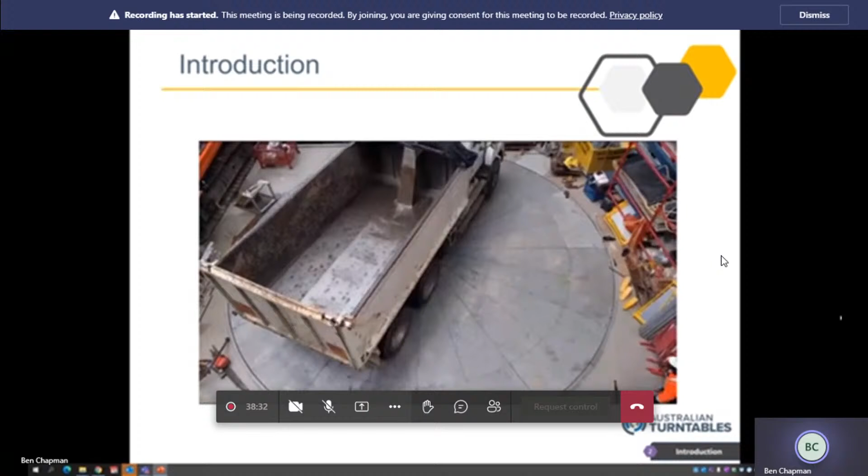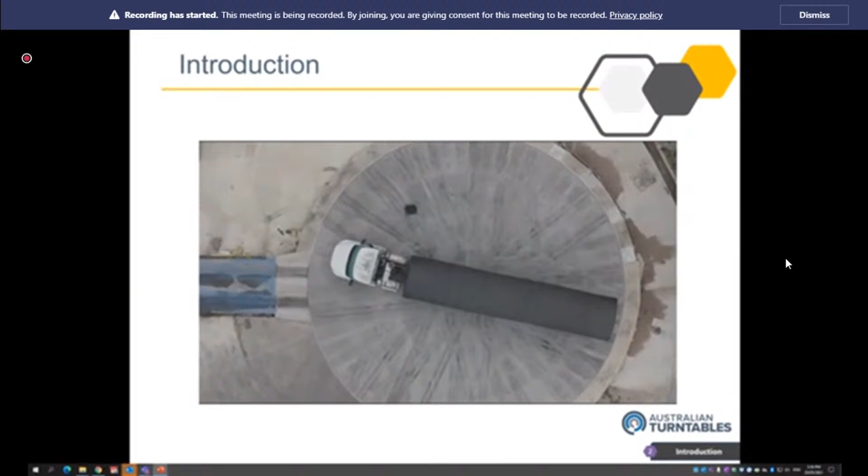I'll just start off with the first slide, which is a bit of an overview showcasing some of our heavy industry projects. You'll see here a number of different industries and applications, but all very much centered around the same simple process of positioning trucks a lot more simply on a construction site.

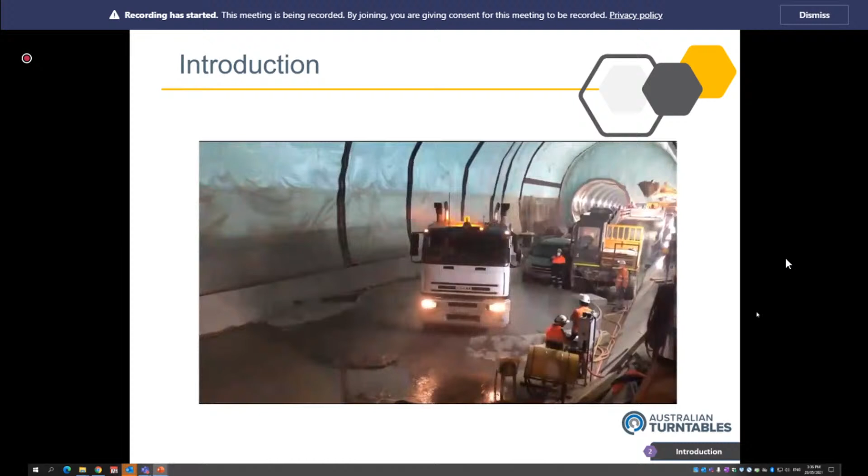Again, I want to say thank you for this opportunity. We have developed a new way for the tunnelling and construction industry to improve safety and efficiency on job sites. We're here to discuss the benefits and the details. We've been considering the tunnelling industry for quite some time, delivering solutions for projects mostly in Australia for the past 6 or 7 years. I'll show you another quick video, a case study of a recent project we performed for the Sydney Metro site just last year.

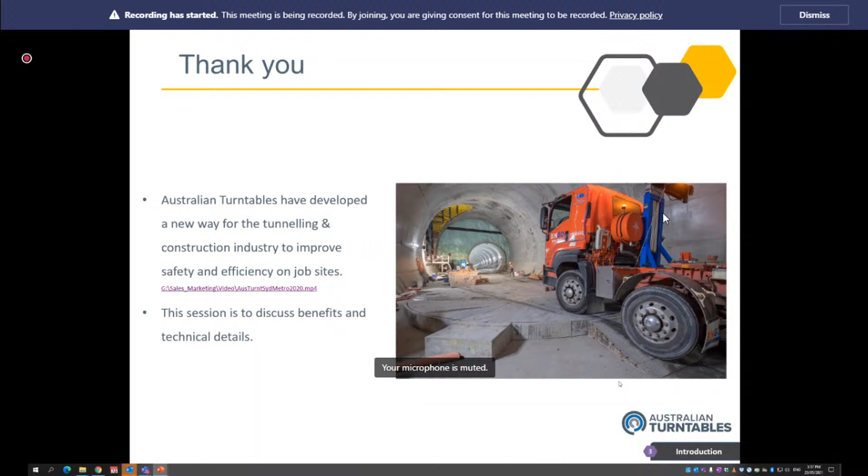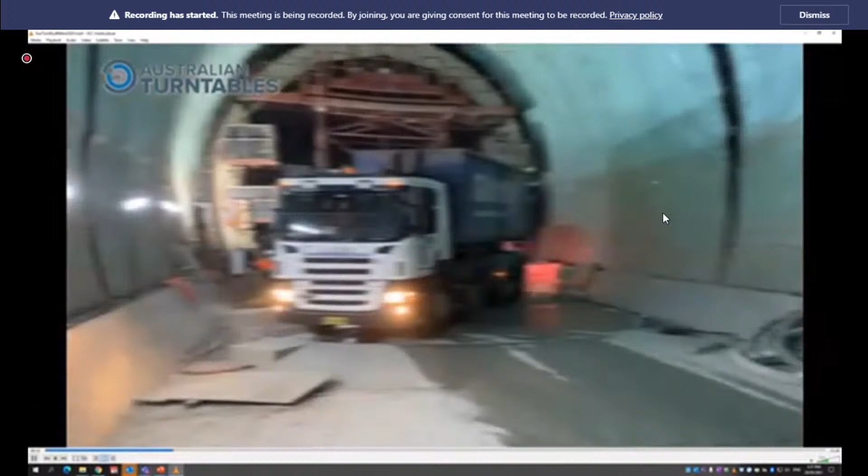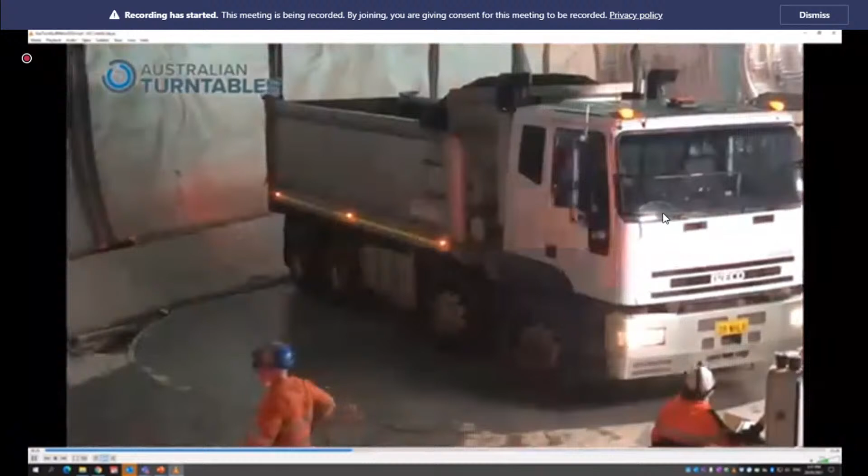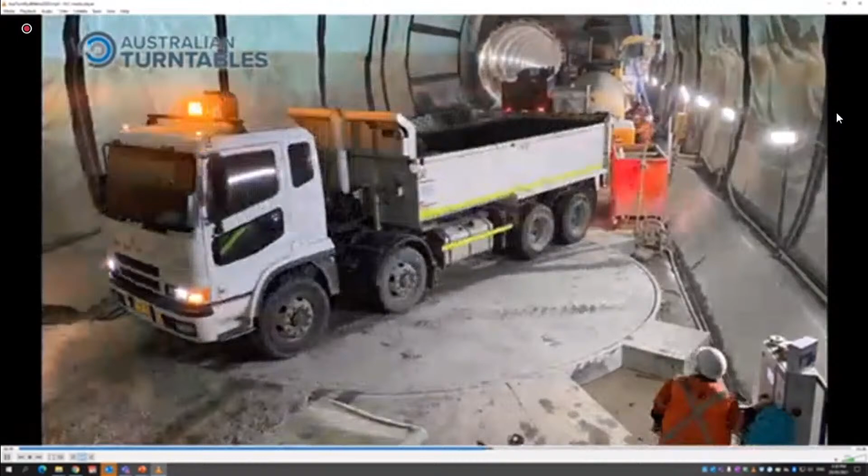The Metro is actually the largest public transport project in Australia. It gives us the ability to do so much more, lessening constraints, and it's a perfect tool for sites or areas that are tight. Turntables has given us the ability to turn spoil trucks and concrete trucks underground. It is a lot safer - you don't have trucks trying to do 3-point turns. There's no hiccups. The turntables relocated and we were good to go. The contracts, the design, the installation, and the maintenance all went very smoothly. No complaints - it's never broken down. It's been absolutely reliable.

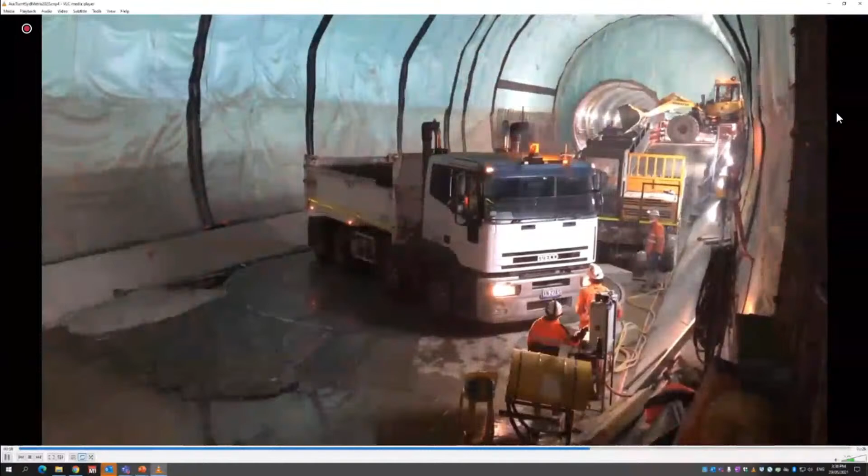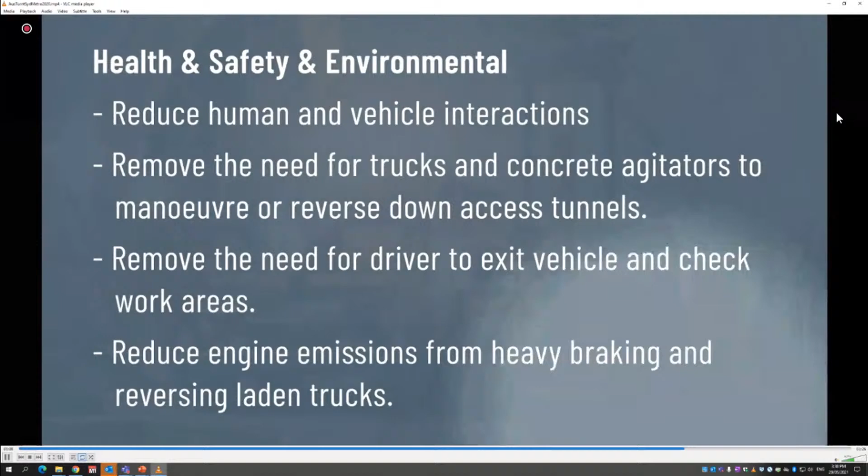I'm not sure if you could hear the audio of that video, but we'll share that after the presentation - I'll be able to send the links. Sorry to interrupt - was it audible? Yeah, okay, perfect. I don't want to watch that again.

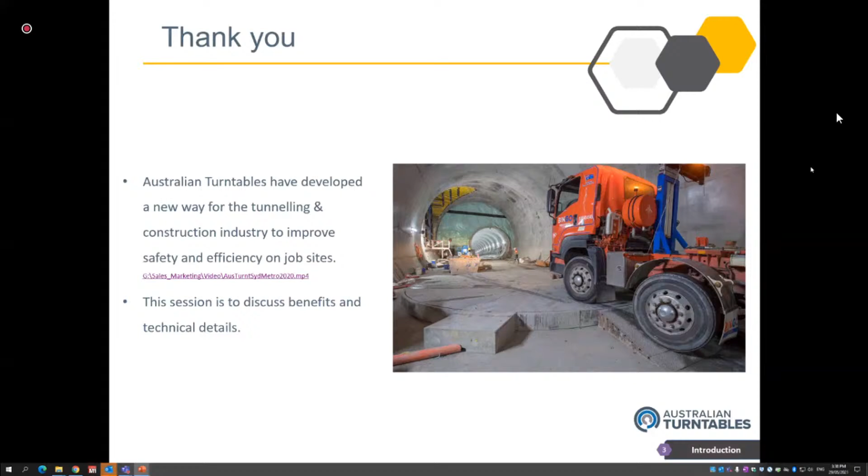At the end of the day, with any technology or product you want to bring into any industry, what's the value to the customer? The construction companies are typically our customers, and these benefits go across all different industries we work in. We really focus on the core benefits, which are improving safety - by eliminating or reducing reverse manoeuvres, we'll get more details on that later. It also increases efficiency and productivity, allowing you to process more material or more trucks per shift.

We utilise space more effectively, and the tunnelling industry is a perfect example of where space is critical. If you get an opportunity to optimise space, then that is worth looking at.

Obviously, traffic management in the tunnelling environment is a real challenge. So we certainly simplify traffic management at the design stage and reduce traffic delay.

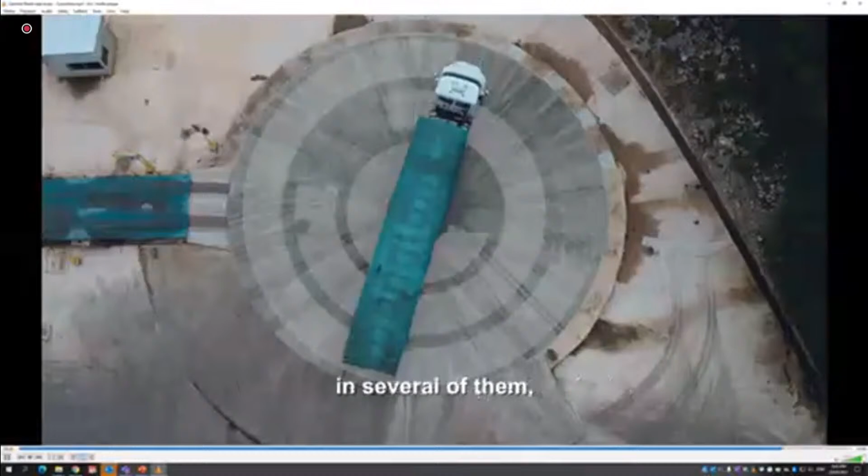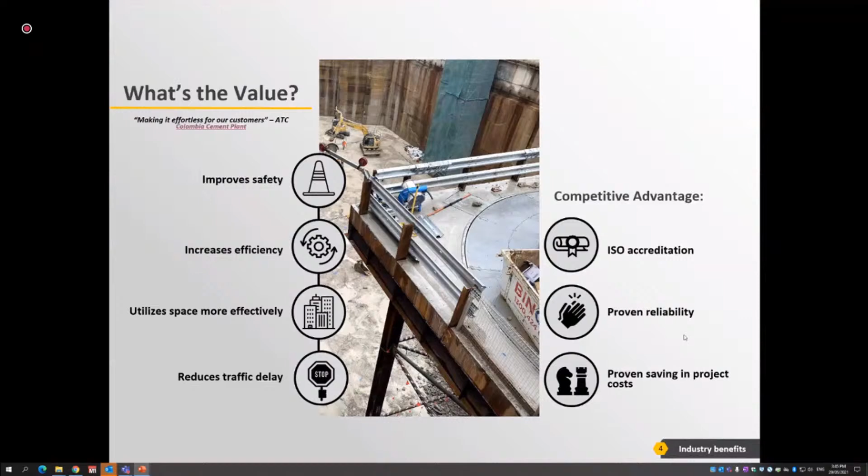So moving on, just a quick background on Australian Turntables. The company was founded in 1987. My mother and father started the company, and from the moment I finished my schooling, I was dragged out of bed to join the company as well.

So I've been at the company for a very long time, worked on a lot of projects. Since 2000, the company's been ISO accredited in safety, quality and environmental standards. They're obviously more and more important, but we see them as a sign of the quality product and company that you're going to get.

We've exported to 21 countries around the world, and we have agents, distributors and partners in a lot of those. I know the webinar is organised by the Indian chapter - India is one of those countries we are focusing on. We've been promoting ourselves into the market in tunnelling, but also in mining and cement plants for the past 12 months or so. And we've also just in the last week incorporated a subsidiary company in India, and very soon we'll have our employees on the ground ready to support everyone we're selling to.

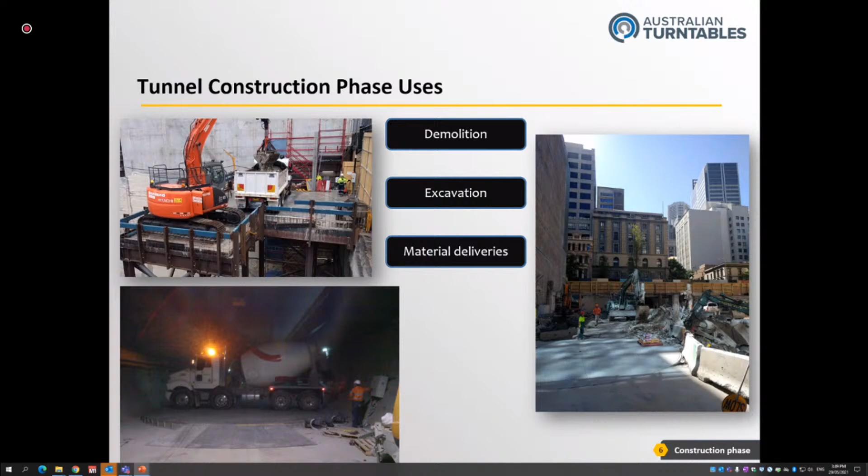But the key, really one of the key benefits of this product, particularly in the tunnel industry, is the safety benefit. I'm sure everyone's probably come across the issue of having trucks having to reverse long distances down a tunnel, or they have to do 15-point turns in a tunnel. It's not ideal, I think, for everyone. So what we're offering the tunnelling industry is an opportunity to reconsider your traffic management and flow.

And really try to eliminate that safety hazard, which obviously elimination in the hierarchy of controls is the most effective solution you should strive for. We believe that the turntable achieves elimination of reversing manoeuvres, which is a massive safety benefit. So in all the global codes of practice, they will talk about reversing trucks as being a major contributor to deaths in the construction industry all over the globe.

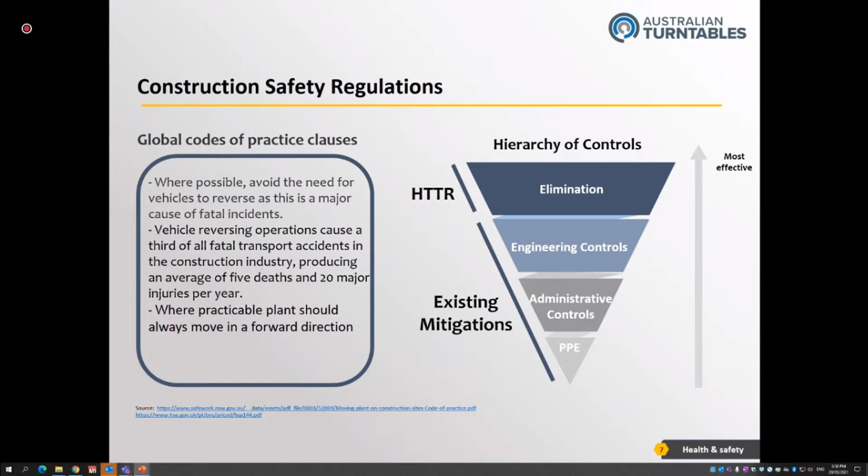So the numbers are varied, but fairly considerable. And as they say in there, where practicable, plant should always move in a forward direction. So that's what we're offering from the safety side of things.

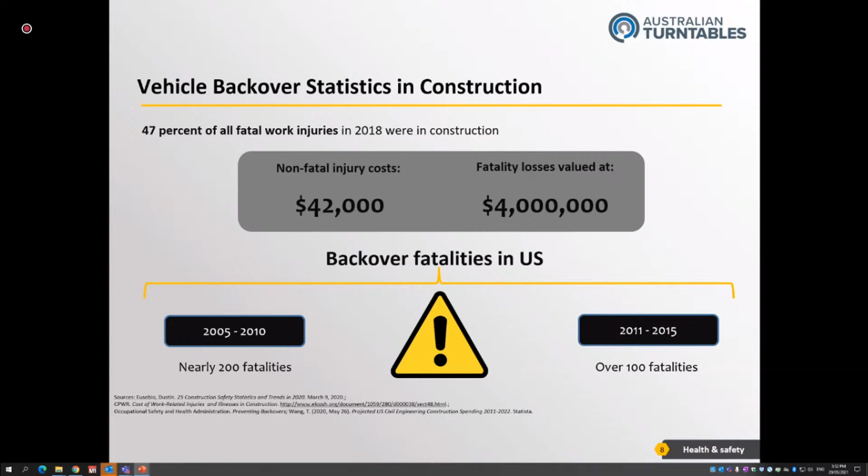So again, with the health and safety focus, we eliminate reversing or reduce it at the very least. We eliminate multi-point manoeuvres. Since 2012, when our construction clients have put these on site, we've had 0 truck-human incidents or interactions recorded when the turntable's been installed. We think it's a great solution for that alone, the health and safety. But obviously that doesn't always get considered in the cost benefit analysis, so we have to look at some other avenues as well.

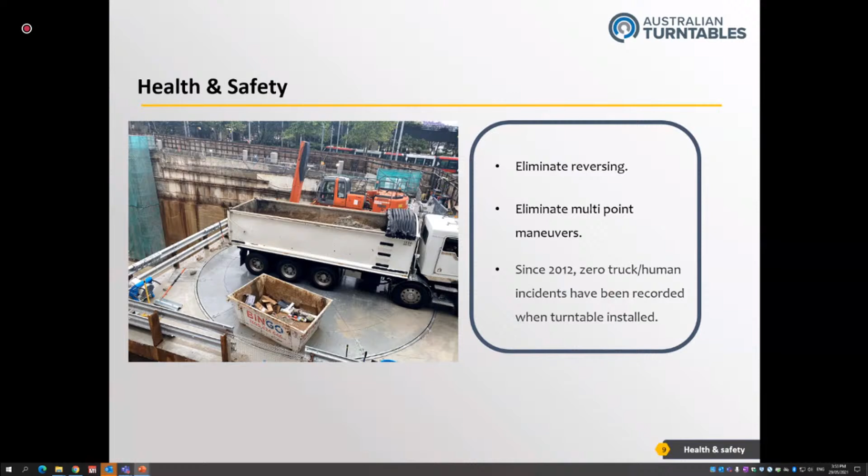Just one more on the health and safety - what you'll see is the turntable, but what people don't normally see is that we also provide systems around it to act like a safety curtain, using sensors and laser scanners and other equipment surrounding the turntable. If anything moves into that space, or the vehicle isn't positioned properly, the turntable either stops operating or doesn't start. So if the truck's turning and a person walks into that designated rotation zone, the turntable stops automatically. There's some really good technology supporting the actual turntable platform.

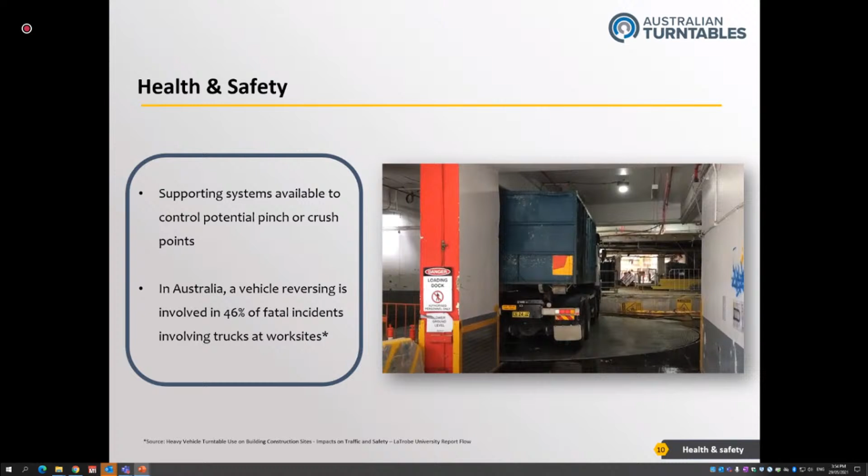Coordination of space in tunnelling is a key consideration you'd all have come across. We reduce the traffic area, because normally you need to allow space for trucks to turn around. We reduce that area, so you can optimise the space for other purposes, or it might mean reducing the number of turnaround bays. That increases your design options if you've got the turntable.

Considering tunnelling, we can supply a portable unit that moves along as the tunnel advances, or if your construction requirements mean you suddenly have an issue at a different site, we can relocate the turntable to that area. So it really improves your traffic management.

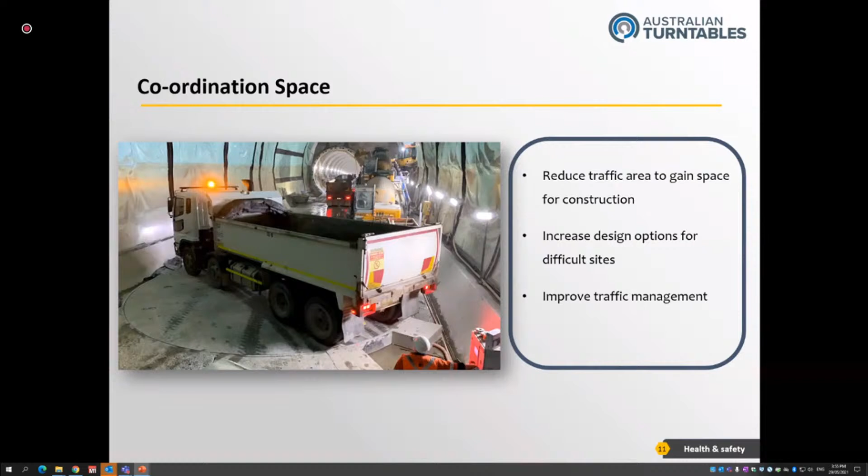As I mentioned, it reduces the need for construction of turnaround bays, depending on the type of tunnel construction. I've got a flag here - I'm not an expert in tunnel construction, my specialty is turntables, but we've been involved in a number of projects so I know where the benefits are. In Australia, in some tunnels, they have to construct turnaround bays. The only other option is for a truck to reverse long distances down a tunnel. We eliminate the need to do that.

And that obviously, if you're not reversing a long way, reduces vehicle collisions with construction plant and infrastructure. So any scaffolding or type of plant installed in the tunnel during construction is less likely to be damaged by a vehicle crashing into it.

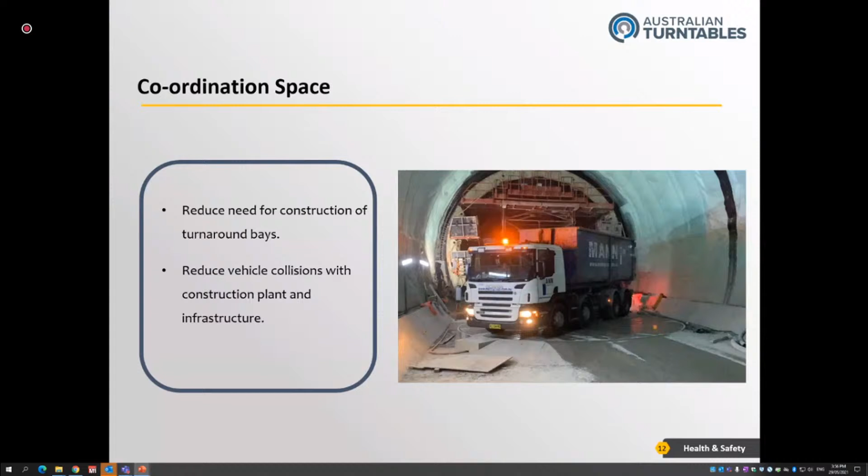A massive key benefit - and I've got a case study which I'll discuss further down - is productivity. We increase the number of traffic movements per shift. For concrete delivery on the tunnel projects we worked on, we're often tripling productivity once the turntable's installed, just by allowing trucks to deliver, rotate and exit in a forward direction - a minimum of three times productivity gain. That has an impact on whether it's excavation or concrete delivery.

It allows your planning, when scheduling, to achieve a much better result. In concrete delivery, without a turntable you might be restricted by the site to X amount of cubic metres of delivery. With the turntable, you can allow for a much larger volume delivery during a shift, giving you more options during the planning and scheduling stage.

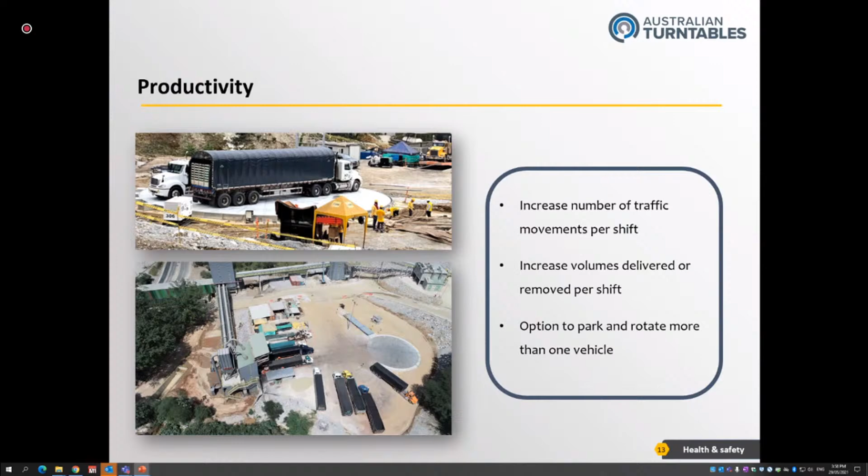So one example of that productivity gain - this is a project for excavation in the Sydney CBD. The construction team were planning for 70 trucks per day. With the turntable, they averaged 170 trucks per day in a 10-hour shift. That was a great example - I've got some video of it here, and you can see it in operation.

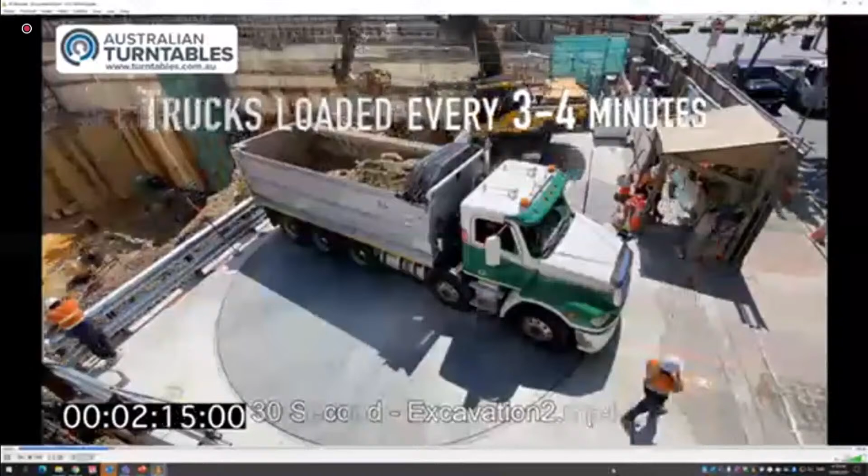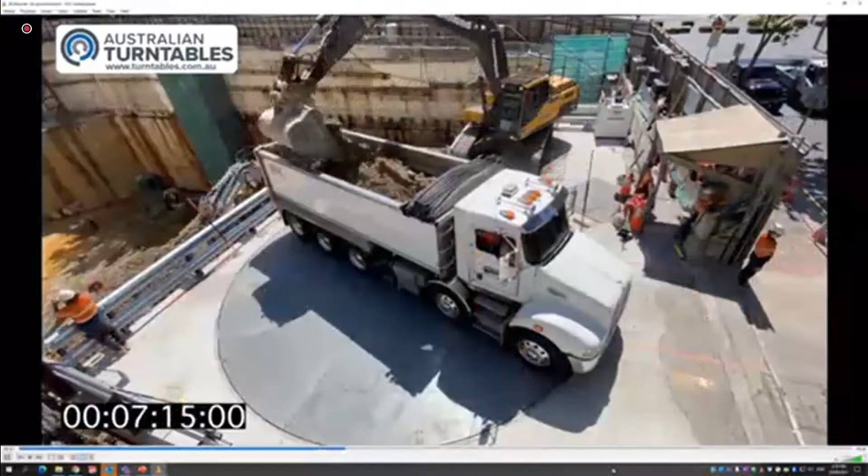It's obviously sped up, but you can see it's really efficient. It's right off the street. Trucks know exactly where to position themselves, and even while they're rotating, we're using the turntable to position the trucks, which simplifies the process for the excavator. This just kept running all day.

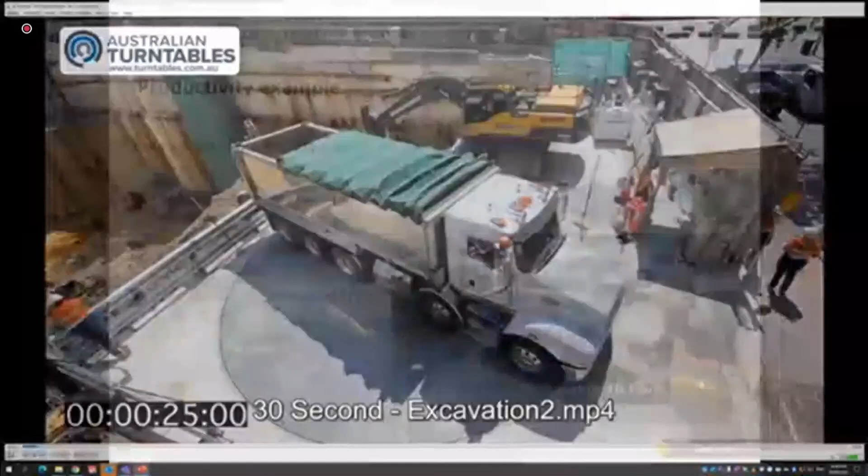Some results we achieved with the Sydney Metro project, the Pitt Street, which has been completed now. We actually came in halfway through the project because the team were really struggling with their schedule. They were going to run well over schedule, and in this particular project the charges for late delivery were significant. So they brought us in.

Before we installed the turntable, they had a maximum of 10 deliveries in a 12-hour period in this particular area. As soon as they installed the turntable, they achieved 35 deliveries in 12 hours as a maximum. So again, pretty much more than tripled the productivity gain on site for that place.

They had a 30-minute truck turnaround time for each truck cycle, which is the reason why they couldn't get as many trucks through. We reduced that down to 3 minutes. So a massive reduction in the turnaround time of the truck.

They really did have schedule challenges, so they were going to run over schedule, which was going to cost them a lot of money. But because they installed the turntable, they brought the project back in line and finished ahead of schedule. So just an awesome result there.

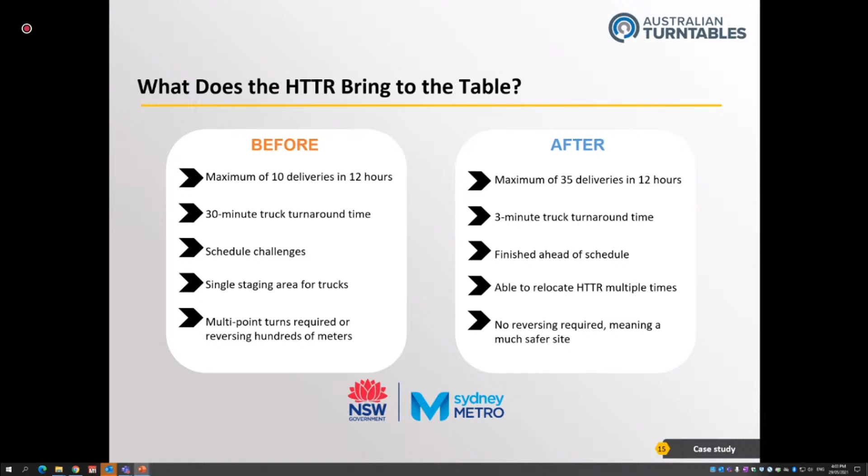So again, return on investment, as I mentioned before, we do explore this really deeply with our customers, and we're often helping understand the opportunities to look for return on investment and help to write the reports if required. But often, particularly in tunnelling, we can really reduce the schedule, particularly in the construction of the tunnel as it progresses.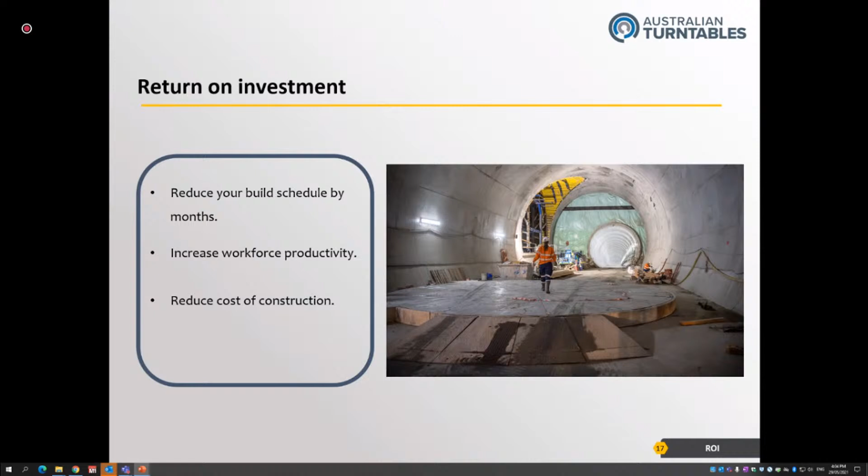We increase the workforce productivity. Obviously, if you're able to deliver more concrete per shift, you can also get a more productive workforce as well. Again, it's the same in the excavation, and it reduces cost of construction purely by reducing that schedule.

So there's some keys there that help deliver a cost benefit to the project. So we can show in a number of ways that you include this product on site, it actually makes the project more profitable for you in a small way. So the product is hired, so there's no capex or capital expenditure, and we hire it out. We also maintain the product during that period, so there's no maintenance costs. Operating costs are very low. So with the cost once the product's on site, the cost is much lower than the returns that you get.

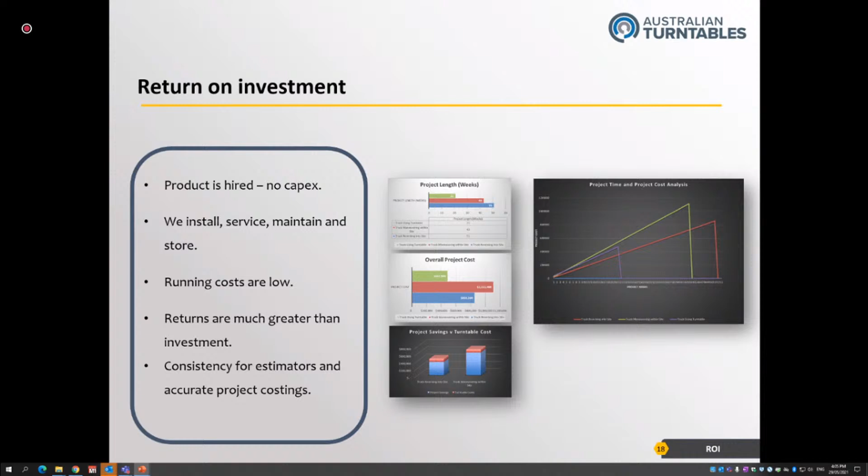It also does allow at the design stage and tendering stage, estimators when they understand what these benefits are, you can get a much more consistent result with the turntable delivery, less issues to face on site, and the estimators can get much more comfortable with achieving their estimations or their assumptions.

So, mentioned support, we'll assist the company during tender stage. There's no cost to do that. We're happy to work with any company to see where the turntable might benefit, provide a proposal, and provide some design options. There might be some things that we can bring to the table that are a great idea and benefit you even more.

And obviously during construction with your engineering teams, we work with civil, hydraulic and electrical engineering disciplines. We do that every day, so we provide a lot of technical support in those fields, and obviously the safety space as well. The documentation that we provide is delivered to global standards because we're working with the tier ones across the globe all the time.

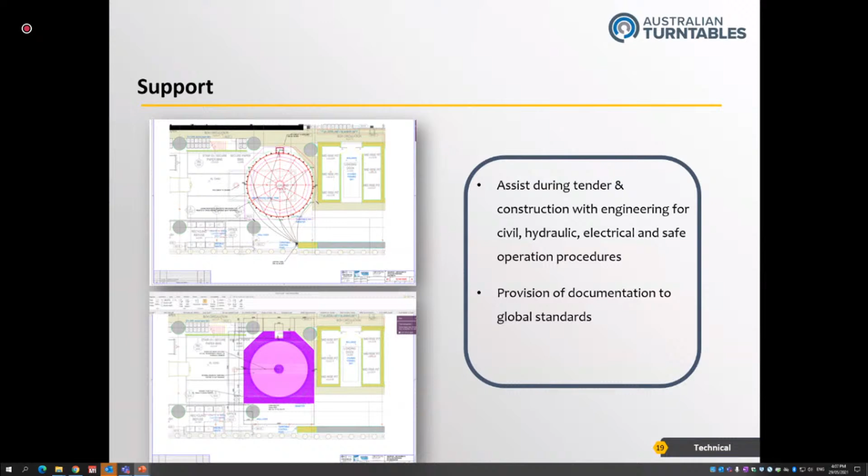Okay, so we'll start to get into a bit more of the technical side of things now, and I know some people will be looking forward to that.

So one shift, we've got the turntable up and operating. The only bit of plant we require is a 3-tonne telehandler or forklift - so very small equipment, nothing major - and it's a modular system, so it just goes together. It's really like a Meccano set, and you can see one being installed on site.

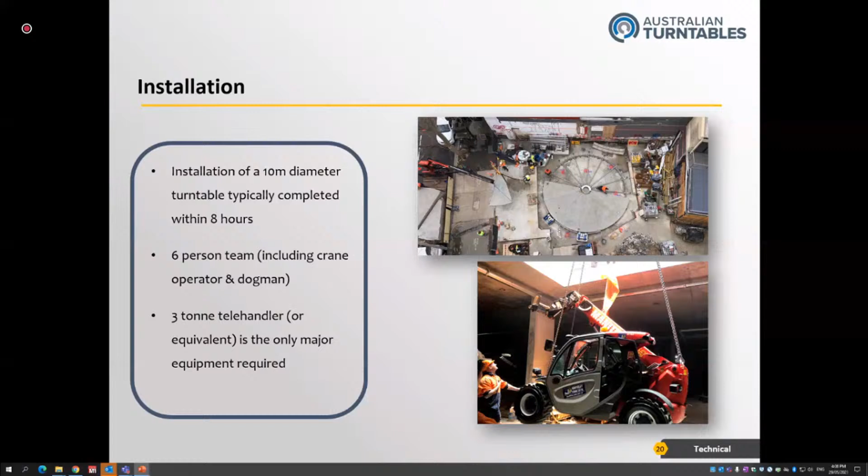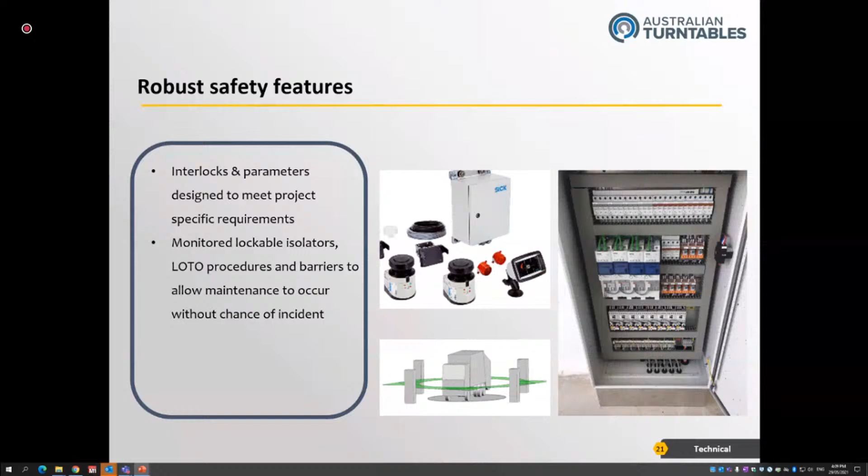The product comes with robust safety features, so we have all the interlocks and parameters designed to meet the project-specific requirements. During that design stage, we'll understand exactly what you need, and we'll provide that system that suits. The procedures, like the LOTO lockout, tag out procedures, we provide, so to allow maintenance to occur without any chances of incident. So safety of the people using the turntable in operation, but also we look at the safety during the maintenance period as well.

Operations, very simple. We do train and provide verification of competency certificates to the people trained in operation - the on-site staff operate the turntable. We develop safe operating procedures, and that is a part of this system. So there'll be some boxes that have to be ticked off, and once they're ticked off, then it's simple: you press the button, you pick the direction that you want it to rotate in, and you press a button. If you take your finger off the button, the turntable stops, and obviously you've got all the emergency stops and safety equipment backing you up as well. So it's a very simple system to operate, but again, we provide the proper training process.

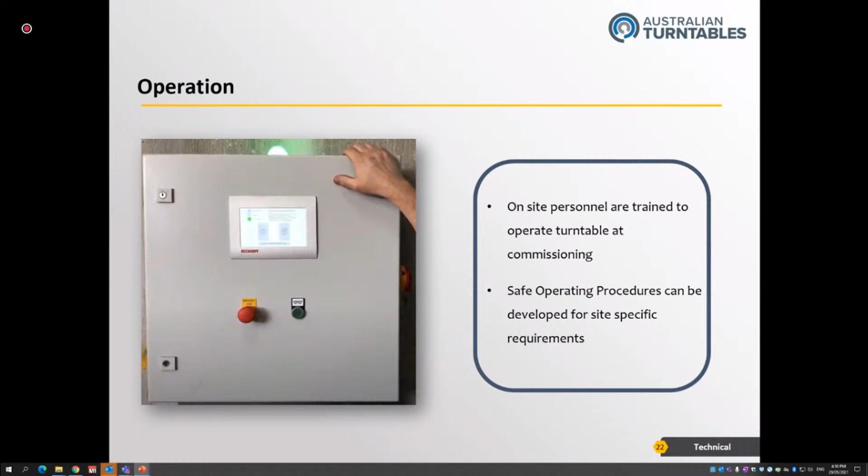With regards to specifications, the mechanism of this standard product, or the most common product that we deliver, is 300 millimetres deep. So obviously in some tunnels there's height restrictions - 300 millimetres for their mechanism typically doesn't impact that badly. It can be installed on a range of foundation types - we can install on compacted earth or gravel, we can install on a slope or an incline. Even with water ingress into the turntable in the tunnelling environments, the turntable can accommodate all of those things.

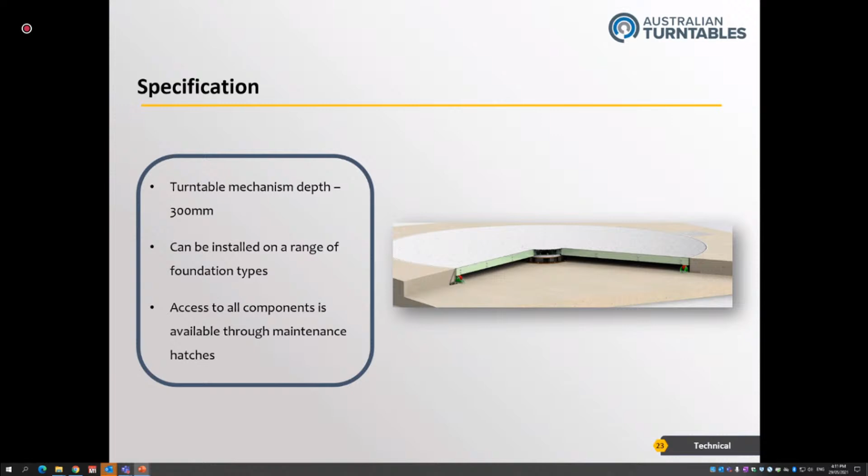And what's important is that everything's accessible through maintenance hatches. In really dirty environments, in mining and tunnelling, one of the biggest things we have to do during maintenance is clean out the turntable pit, because it gets a lot of contaminants in that area. But with regards to locations of installation, it's a very flexible product. All we need to know is where it's going to be installed, and we'll provide the system to allow that to happen.

To go into detail about the product, we have a central slew bearing. We use a product that's engineered for 6 million rotations, and it's actually engineered to cater for a much larger load than typically would be used - so it's a reliable thing. The reason why we use such an overspec'd slew bearing is because it helps us reduce the height and keep the product within that 300 millimetres. We include all the safety factors that would be industry standard - whether it's 2.5 or whatever, we consider those loads and apply it to the engineering.

And the system comes with automatic greasing and lubricating, also an automated cleaning system for whilst it's in operation. So there's some automation of the product happening underneath whilst in operation that's going to improve the reliability of the product and reduce maintenance requirements.

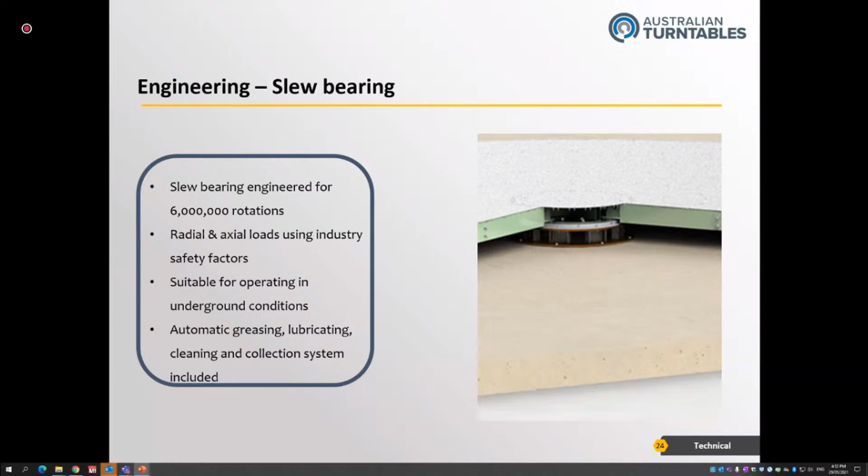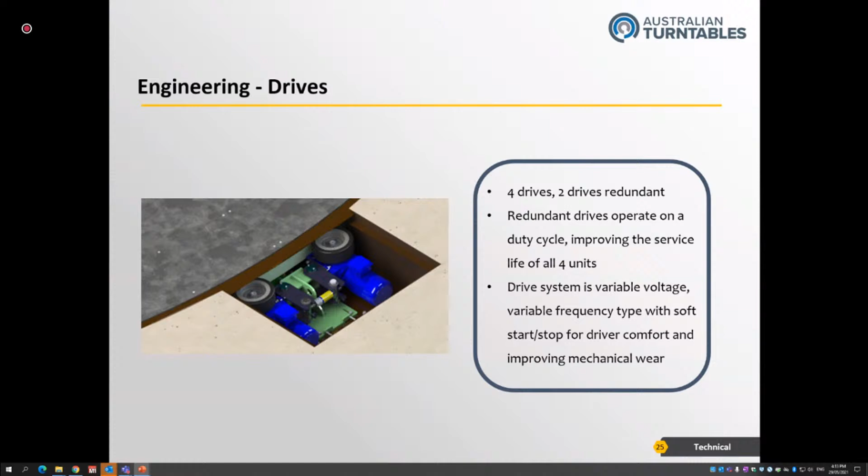The drives here, again, we include redundancy into this part of the product, and we do that by having 4 drives required on this standard or most common product. 2 of those drives are redundant. We still run them on a duty cycle, improving the life of the 4 units, and we're using a variable voltage, variable frequency type - pretty common motor and gearboxes. You're talking about 1.1 kilowatt motors, so they don't cost a lot to run. They're fairly small, but they're very reliable.

As an idea, the reason why we provide 4 drives is 2 drives are required for operation. If one of those drives fails, a fault's indicated, and the drive can be disengaged. That faulty drive is disengaged, and the remaining drive will continue to operate until the planned changeover happens. So within 10 minutes, if you have an issue with one of the drives, you're back up and operating. So we really reduce that opportunity for loss of production.

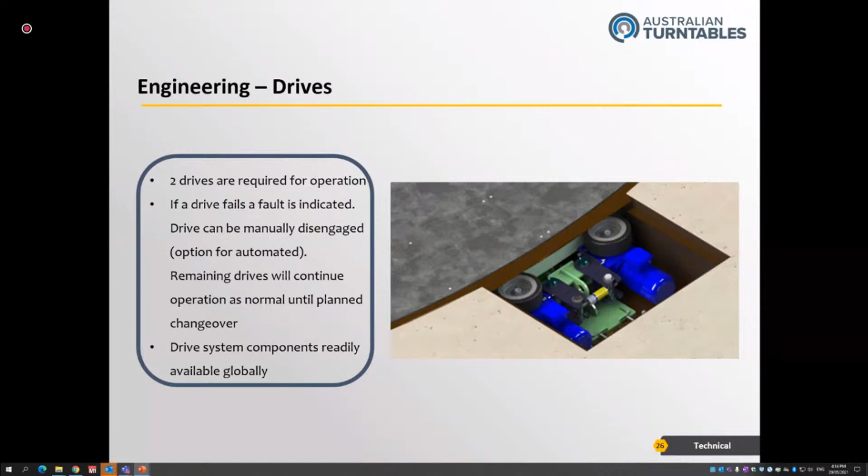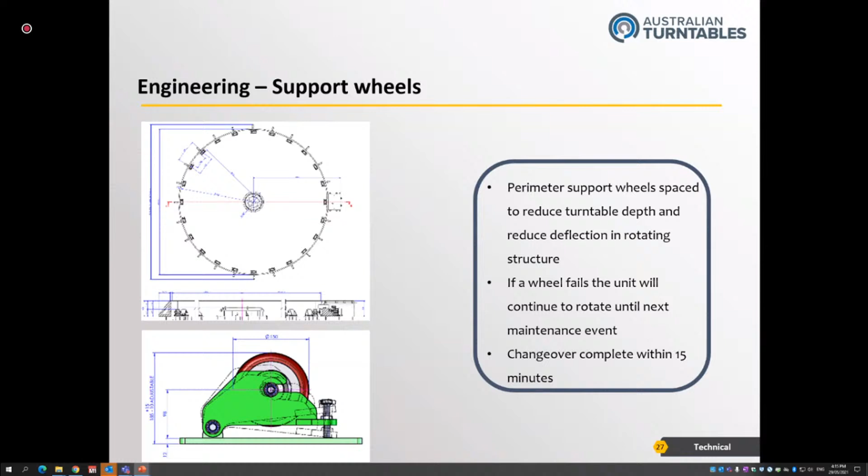Support wheels are placed around the perimeter. We space them to reduce the turntable depth and reduce deflections. So it's not only to rotate the turntable, it's also a structural element. We provide extra wheels, not only because it allows us to keep the height down to 300 millimetres, but also if one of those wheels fails, the turntable continues to operate, and a changeover is complete within 15 minutes.

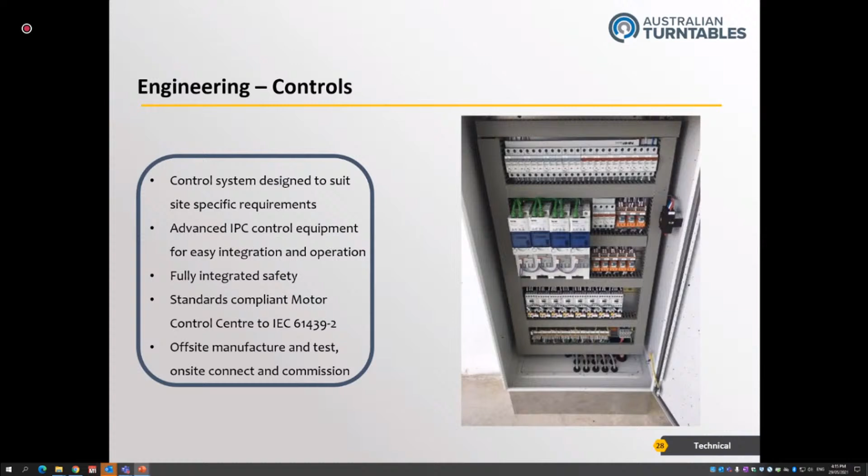The controls are an example of one of our control stations, and they're designed to suit each site-specific details. It's all fully integrated, using advanced IPC control equipment, compliant to IEC standards as required, including tunnelling standards. We design the control centre to suit those requirements, and whilst it's complicated, we try and keep it as simple as possible.

Again, reliability, along with redundancy and fault finding, we have backup systems because the power supply might be disrupted. So we also provide the turntables with manual operation, in a couple of different ways, so even if power's down in that area, you can still operate the turntable. It's not as efficient or easy, but you can still construct and get your truck movements through the tunnel.

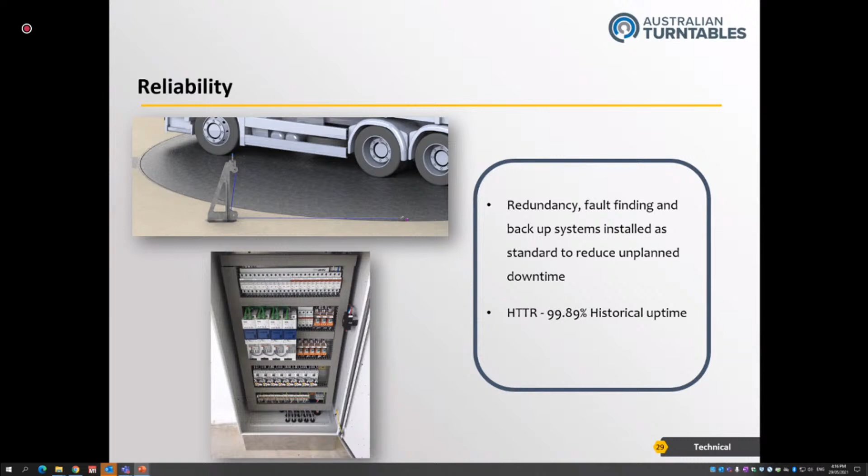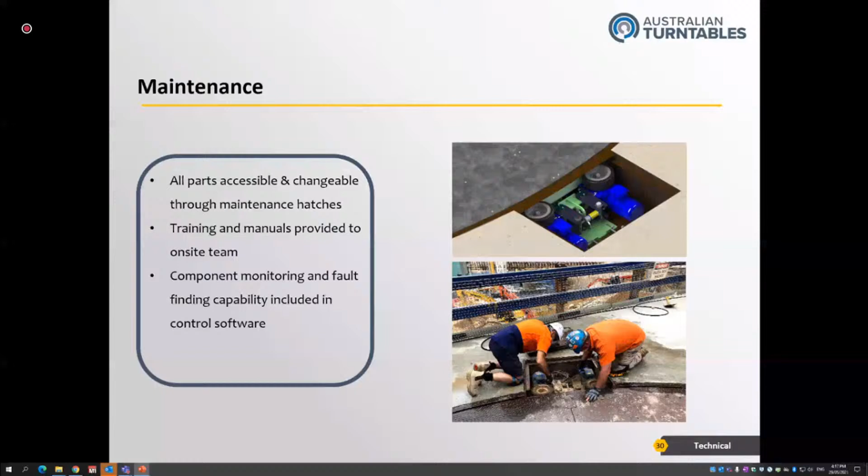Again, maintenance - all the parts are accessible and changeable. We provide training manuals to the on-site team. We also have people on the ground all over the country who can provide what you need, but it's also best if the on-site team have the capability to maintain it. So we train the people on site to look after the unit for a much faster turnaround. We also have remote monitoring of the components and fault finding, so we can remotely check the turntable and make sure it's running as it should.

Just some procedures there, but here you see some examples of the access to the areas where we need to go. We keep that accessible - if the access is good, then the maintenance is a much faster process.

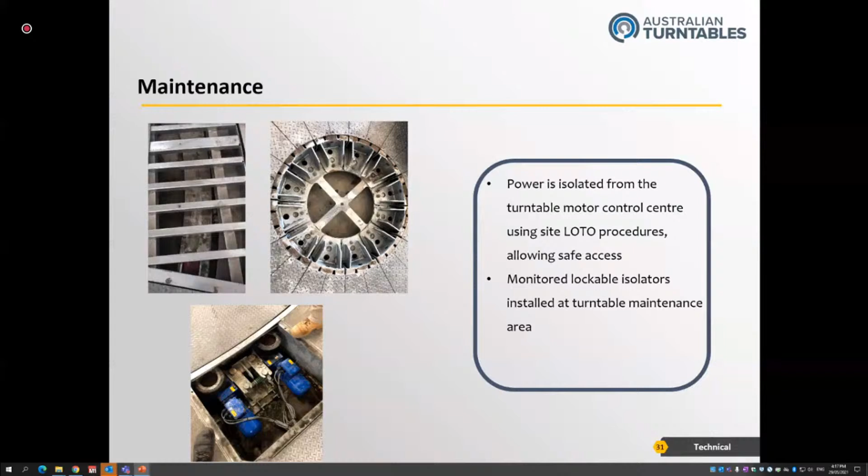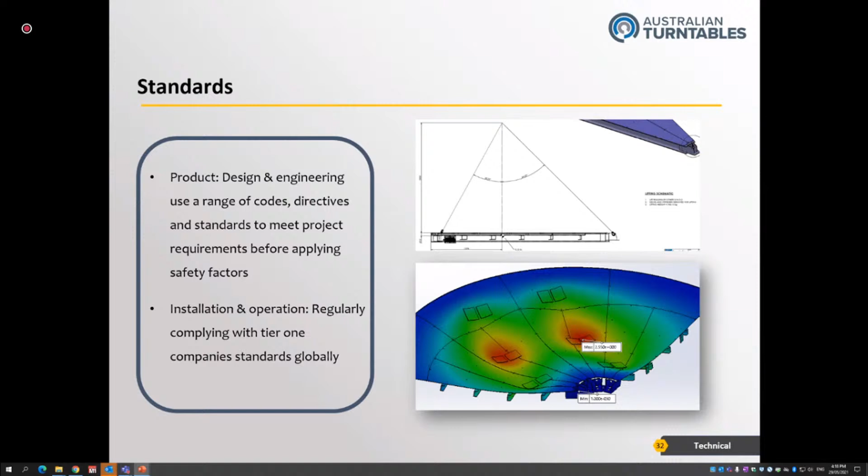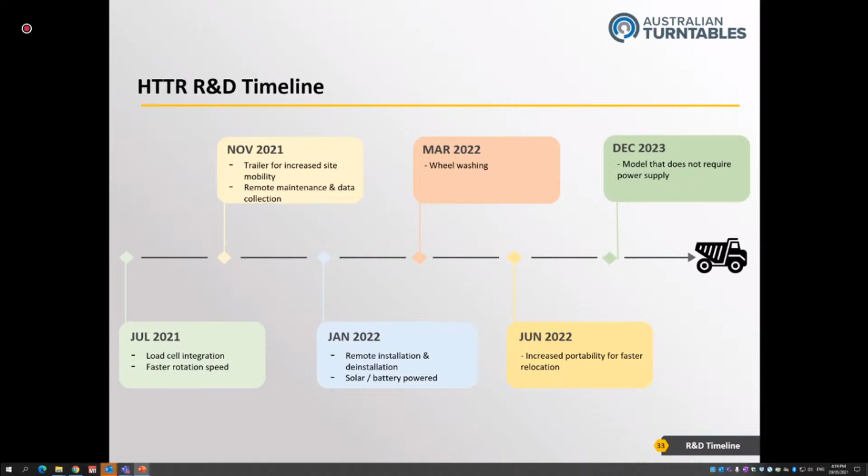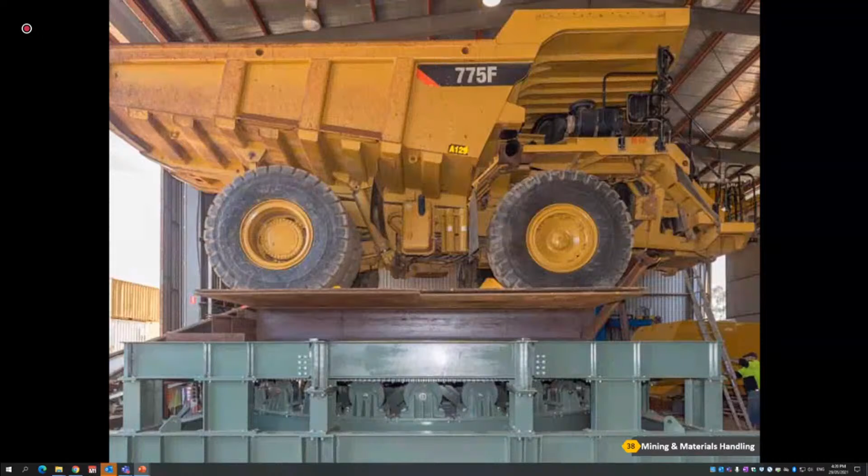I just wanted to finish off now with some images, just to lighten it up a little bit, of some other projects we've delivered. But as you see, it's pretty much always around saving space, improving safety, and increasing productivity - those are the keys.